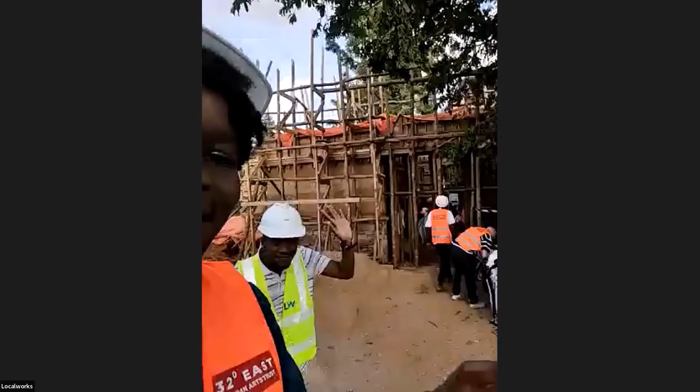So I'm kind of stalling right now, but we're getting there. We're getting there. James is a team person online. So yeah, I guess when you're ready, are you ready, James? I think we're going to be ready in about 2 minutes. Okay, so we'll be ready in 2 minutes. He's just run off now to get sorted with a few things. It's fun, it's a lot of technical support, and we've got a few cameras set up. So we're looking forward to seeing how this goes.

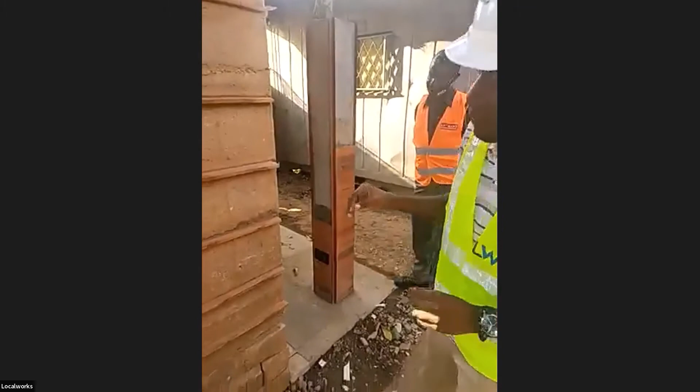I thought we should start from here, which is the sample wall. Usually on a project like this, many of the technologies we are using are a bit unconventional in this particular context, so we needed to test out most of those technologies. We decided to build a full-scale model on site, trying out different technologies and learning lessons along the way. As you may rightly see, there are certain things that over the course of this trying out and learning we have actually perfected on the actual building, as you will see.

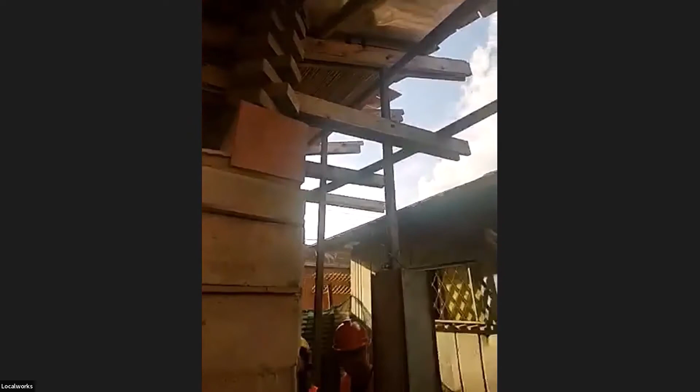Since it's a kind of hybrid thing, for those with questions that are more artistically inclined, you may ask, and those who want to understand the technical aspects, say, of the rammed earth or the stone masonry, why we have these clay drips sticking out, or the textured brick, how the roof works, why are we even using a wooden shingle roof? All those are questions we are hoping to engage with, among many others.

But basically, I think we can move around the sample wall so that you try to get a closer look at some of the things we are putting together, and possibly that could trigger in you some questions to ask.

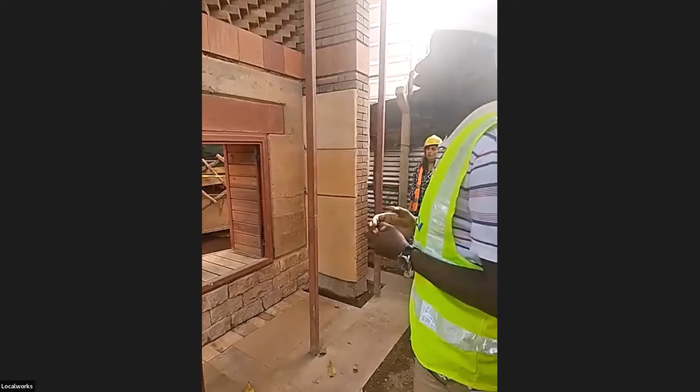So by and large, what we try to do as a practice is use materials that are locally available, because we believe in trying to build the local economy, trying to build on the craftsmanship that's already found in the local context. Part of that was also using earth.

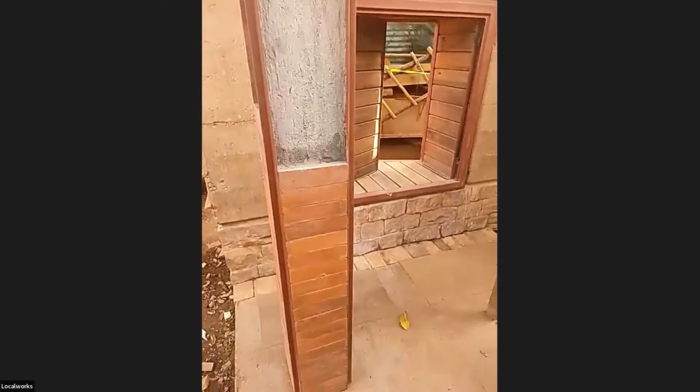You notice there are so many variations of earth in this project. We have rammed earth, we have compressed earth blocks, we have clay tiles. So there's a lot of earth going on, and maybe James Hampton will talk more about how that conversation of earth began.

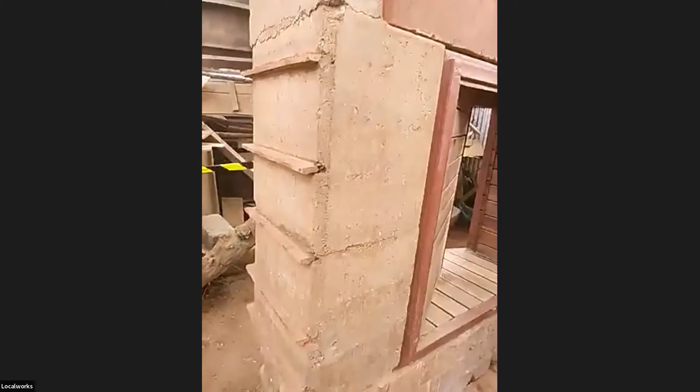When you're using earth in different kinds of usage, you have to be aware the way a rammed earth wall works as opposed to solid masonry in compressed earth blocks is a bit different. So it calls for a level of detailing. You notice there's a lot of chamfers going on in the rammed earth, and one would ask why. They are not just a design feature, but usually the corners of the rammed earth are the ones most prone to chipping. So when you provide a chamfer, you're cognizant of the fact that that will happen. You're trying to design with those things in mind.

Also, the compressed earth blocks are a thing that we create from the site. We'll be seeing the production shed in a moment. Basically, we've used the earth that we found on this very site, which still speaks to our whole design philosophy and our way of working, that we try to work with what's there in the most sustainable and sensitive way possible. Yeah, so we can continue moving around.

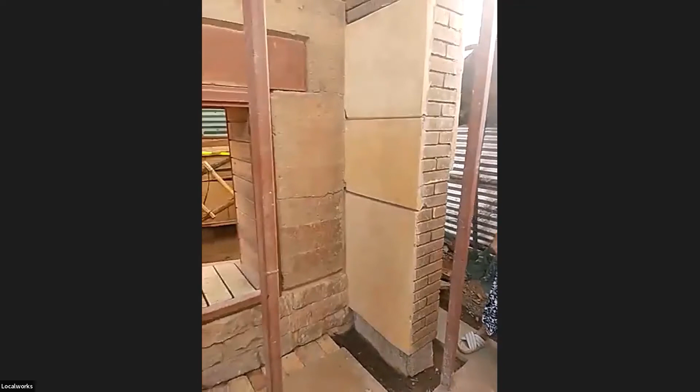You notice the shutters are made in wood. That's eucalyptus wood, and eucalyptus is one of those kinds of wood that you can find more on the market, but we've also found a balance in which we can actually design for it to perform quite well. So we are quite keen on that aspect as well.

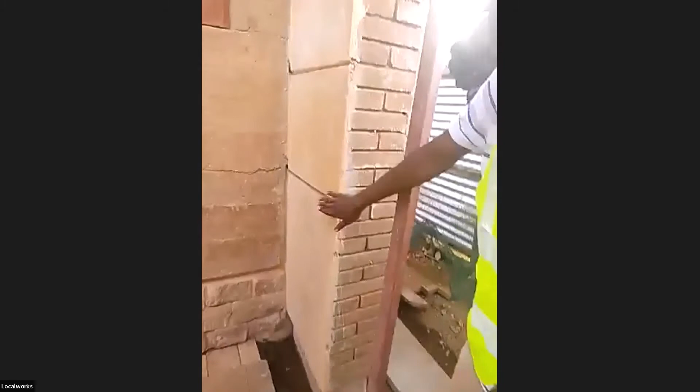What you see here are the plaster samples. Let me talk about the program of the project. This is an art center, so you have studios, a gallery in the second phase, and a cafe area. The areas that are going to be plastered are mostly the studios.

This was a process of back and forth, trying out different proportions of the earthen pigments as well as the lime to get the kind of color we were going for, still within the palette of earthen tones. We tried out quite a number, and I think we chose the one on this other side of the wall.

We had that process of back and forth, and throughout it the client was actively involved, because at the end of the day they have the final say. So we try all these things out, and along the way we and the client are both learning, but it's also like a co-design process. We believe in that collaboration, both in the design and in the implementation of it.

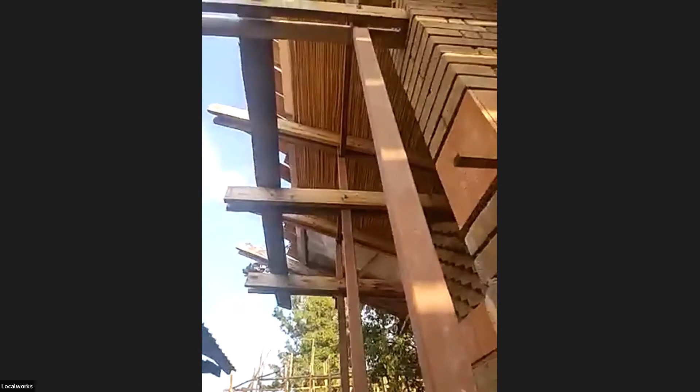I could also talk about the roof briefly. You'll notice we're using papyrus as the ceiling. What was interesting about this project is you have a textured CEB wall terminating where the ceiling literally goes through. So how you treat that junction, where you're stopping the bricks short, was something we really needed to get right.

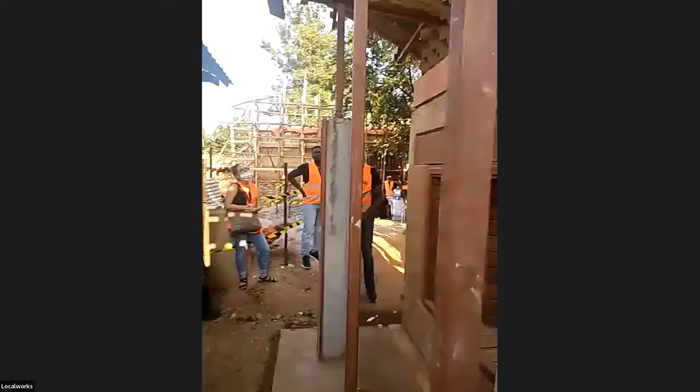We have two questions from the chat. I don't know if I missed it. How is the plaster made?

I guess Edson could speak to that. The plaster is made of lime as a binder, with some clay and natural pigments from the quarry, and sand as the structure of the plaster. The reason we do that is to maintain the openness of the wall, so we try to avoid cement, because cement seals the walls and doesn't help the wall remain healthy. If you retain moisture in, you need to get it out as much as you can. I guess that also improves the quality of air in the space.

Okay, a few more questions. Hi guys, the wall looks great. I'm very curious about the composition of soil, clay, and sand used in the rammed earth wall. Were you able to measure these? Also, what challenges did you face working with rammed earth, and how have you solved them? And another question, where is the quarry for the earth, is it local?

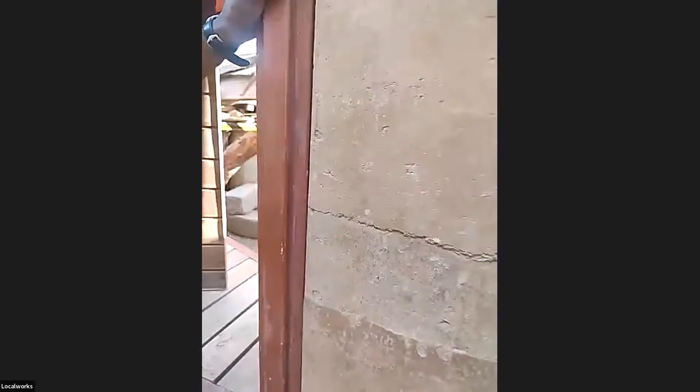Edson's team did a wonderful job designing the formwork, because when you're setting up around that wall, it's like building in concrete—you have formwork, shuttering, and all these things. But if there's any movement, this is going to happen, and at some places more movement can happen, other times less, either going in or out. It's a natural material, so it's prone to minor changes. One thing you need to get right is checking that all the shuttering is right, measuring with a laser meter to make sure everything is properly spaced. Even during the ramming of the earth, things begin to move ever so slightly, so it matters that you go in and double check if need demands it.

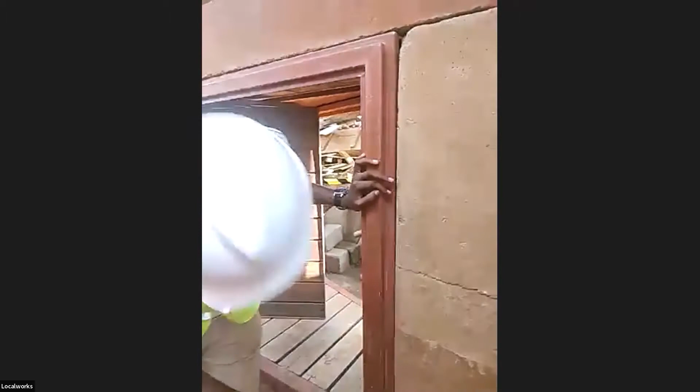The other thing was about these chamfers. What creates the chamfer is within your formwork, you have to create wooden pieces that form the shape against which the earth is going to be formed. Sometimes the wood has a tendency, as you'll see in the project, that the chamfer will bend ever so slightly, or there are minor things that still go back to checking and making sure the carpenters have done what they ought to do. There are a lot of challenges, but most of them are really around keeping the formwork stable.

We are using a pneumatic hammer, connected to compressed air, and it has so much pressure that if your formwork is not designed well, it will just break it apart.

There was also a question about the source of the dye. There's a quarry from our previous project where we get the stone from, even the stone we're using now. So the waste from that quarry is what we use as a pigment for the plaster.

You have a question? It's about color—is there a special way you try to manage consistency of color, or do you just leave it up to the sourcing, wherever it comes from? Is that by surprise, or because I can see it's very consistent in the lower part, and then there's a bit more grayish. Is that wanted? Is there a level where you say this is appreciated, but then it gets too much that you add pigments or something? How do you deal with that?

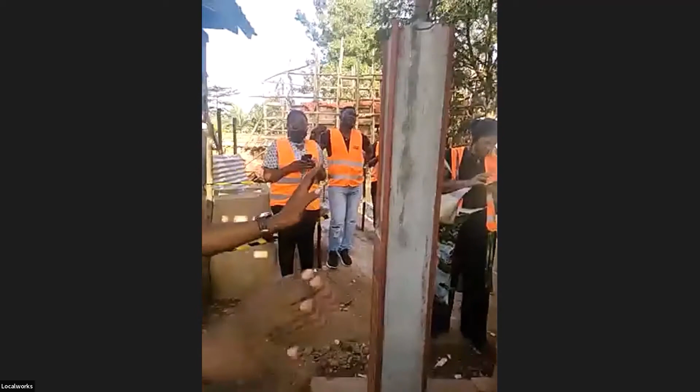One other thing we hadn't talked about is this plinth you see everywhere. The rammed earth never sits directly on the ground, and that's important because stone works better in that application. It's Edson who talks about the character of how this stone, I believe sandstone, is porous and allows moisture to freely move from one end to the other. It allows water to run off but lets moisture move freely through the material, so you won't get water-related deformation. So we have a stone plinth, as you'll see in the project, to make sure the earth is always protected from the elements, and also the roof covers the earth that's exposed to the elements.

I wanted for us to look at the roof just briefly because it's made of wood, and maybe people will have questions there as well.

Much care was put into the initial detail because we drew up the details, but we had to make mock-ups in our personal workspace to try and make sure we were getting the lapping of the different shingles right, and also testing that it will actually work. Will the water run off properly?

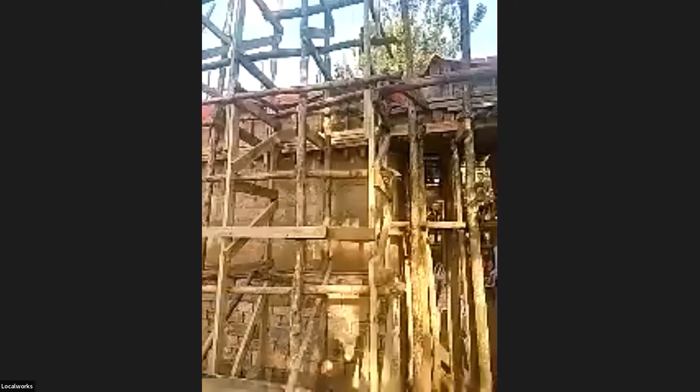What we've done isn't well captured on the sample wall because we actually have a breeze wall above all these studios, above every room, where we'll do these interlocking CEBs while leaving hit and miss gaps. So we are aware we need to allow for cross ventilation, and it's already captured within the design, though we haven't yet reached that level in construction.

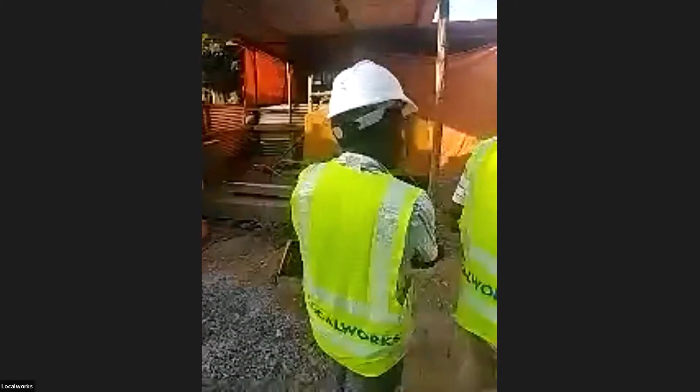Okay, we can walk and talk. We have another question. Hi everyone, I followed the work on the Children's Hospital in Entebbe, where Localworks was also involved in the rammed earth construction. I'm curious why that particular construction required a lot more stabilization than this job. Both areas aren't too far from the lake, so is the soil very different? Did you guys hear? Okay.

Yeah, of course the design requirements were different. The Entebbe Hospital had 2 levels and partially supports a floor. These walls are 7 meters tall, which is different from ours, and the structural requirements were very different. Here we are looking at 7 megapascals, in Entebbe we were looking at 20.

Okay, and sorry, I also forgot there was an earlier question from Natalie: what is the dimensioning of the rammed earth walling and how are fittings connected, bolts etc.? I think I haven't understood the part about the fittings. Which fittings?

How are fittings connected? Natalie, do you want to clarify what you mean? Maybe she means connecting power and other services. She mentions bolts, so...

Bolts, yeah. Now you can screw into the wall if you really want, though it's not desired, because earth is quite brittle, not like concrete, so you want to really avoid that. But it can receive a plug like any other wall.

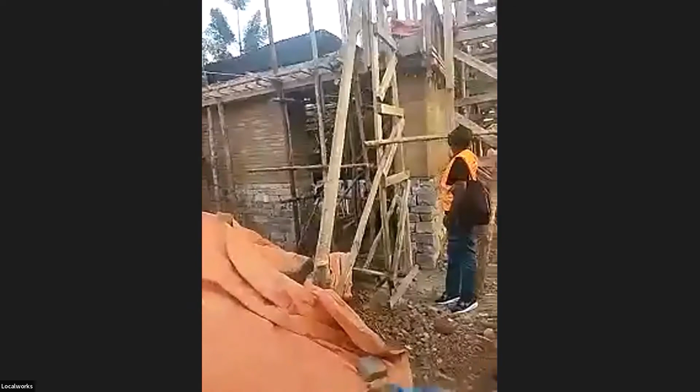We're still going about 1.5 to achieve a total of 3 meters. But then the wall even continues into the roof, so the slenderness is what determined the dimensions of this wall. We're using 500 millimeters in width. The slenderness requirement was for 500, but 500 is also wide enough for someone to work there.

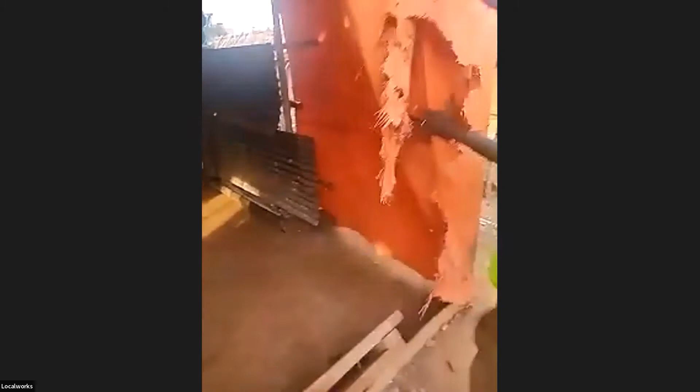What's the average time to build a two-story house, let's say with a kitchen, living room, two bedrooms, and two bathrooms, in rammed earth?

We can give it less than a year. Okay, because this is actually a two-bedroom house, if you ask me. I don't know what we're building here. I think the usable space is 166 square meters, so maybe overall say 200 square meters. And we're taking a year.

Incredible job. Do you spray your papyrus with wax spray to avoid replacement every now and then, or do you just dry and use them like that?

The papyrus, and mainly all the natural materials we're using that are covered, are treated with borax. So as long as you don't have issues with water washing away the chemicals, it should last for as long as it can.

Okay, great. So this is where the sieved soil is stored. What you see there is what we throw off after sieving, for further sieving to try and get a certain level of granules. What you see on the left is the machine, which it's a shame we couldn't try out.

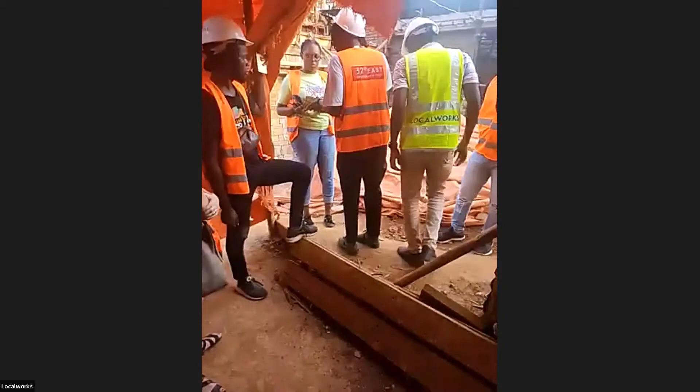So as we walk to the other space, some other questions from our online viewers. To the question of rammed earth wall thickness, why 500? Why not 600 or 300, 400, etc.? And then we also have a question about, is the firm outsourcing any construction, for example, windows? And maybe one more question, and then we still have more, but we'll group them. What is the cost of building per square meter with rammed earth? How does it compare with brick or stonework? Everyone else, you can please feel free to enter.

This is one of our studios. So come. Do you remember the question? Yes, this will be an artist studio.

If you could just refresh the questions, I sort of lost it. One was about the size of the rammed earth wall, why not 300, why not 600. But I feel like I'd already answered that. It's really just on the stiffness requirements and the constructability of that wall. Someone needs to work within that wall with it. So 300, I don't think you can actually work there. But even if the stiffness allows, 600 may be a waste if 500 can work.

Then are you outsourcing any construction? Not really. Apart from plumbing and electrical, the rest is in-house.

Okay, then cost per square meter with rammed earth, how does it compare with brick or stonework? Definitely higher. I don't know, that's something that we can probably elaborate on, because the cost person is not here, but that's something we can elaborate more maybe later.

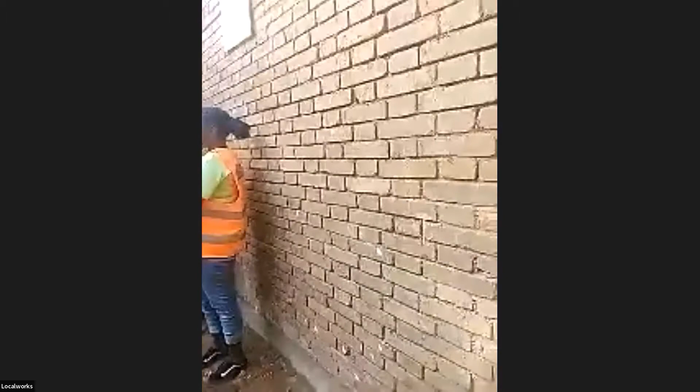One of the things I can mention about that wall in particular, and this as well, these are the walls that are going to be plastered. So the masons were careful with the placing of the bricks, but one would rightly point out that the mortar joints are a bit all over the place. But in the interest of time, we were like, why spend the very same amount of time doing that, which will remain as it is here?

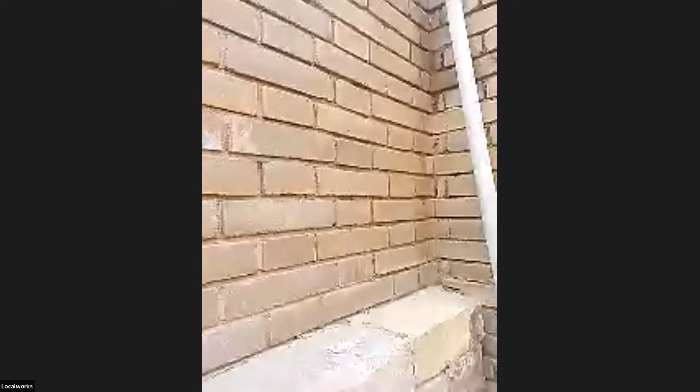It was that kind of thought, that this is going to receive about 20 millimeters of plaster, and you'll notice there's a groove where that is supposed to come and sort of vanish into the rammed earth. So it creates the illusion that the rammed earth starts and stops, and yet it's running all the way through. On the outside, you'll see it running all the way through. So that was a design decision.

And what you see on that side, I see some of the, I don't know who has taken to branding the building already, but they already have signage going on.

One of the interesting things about that wall in particular is the transition from the stone to the brick. And I was asked a few questions earlier about what do you do at that interface, how do you transition properly. So one of the things is a structural thing, that the upper side of the wall and the lower have to be integrated in some way. And possibly Edson will talk about that.

But from an architectural perspective, we tend to be obsessive about that mortar joint being 10. The masons are at pains trying to get it there, but they manage to do it quite well, in my view. So it creates the illusion that it's just sitting there, but there's some structural work underneath that perhaps Edson could shed some light on.

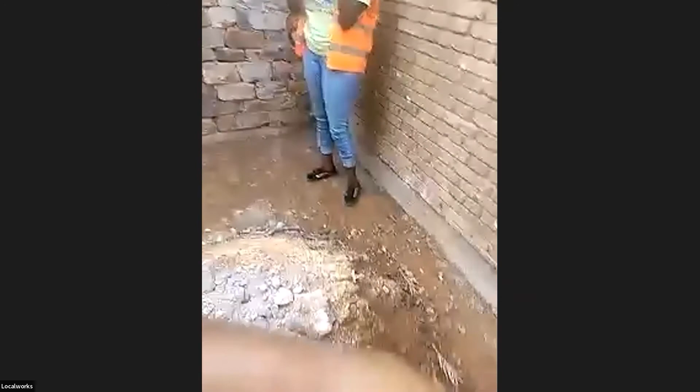There's actually not much there, it's just a continuous masonry. On the earth, we actually have a concrete kicker because you want to put formwork on something that's a bit level. That's on the rammed earth, but on the masonry wall, that is just a normal mortar bed. Right, because it's really a continuation from stone masonry to brick masonry.

So, any questions on this part in particular? Excuse me, just a little puzzle: how do you fit it in? You fit it in with some kind of cement? Which one, the stones?

Yeah, so that they are grouted, they are all grouted with cement. We call it grouting. You have to press them in a good way, not because we are not plastering them, but then the core is grouted. We put cement grout to hold the stones together. But of course we are careful, we are trying to be careful that it doesn't come out because no one wants to see it.

Because now my expression comes with these gullies besides the road. Sometimes when there's a lot of water, you see how it splits. Yeah, it's the imagination I was having relative to this. No, okay.

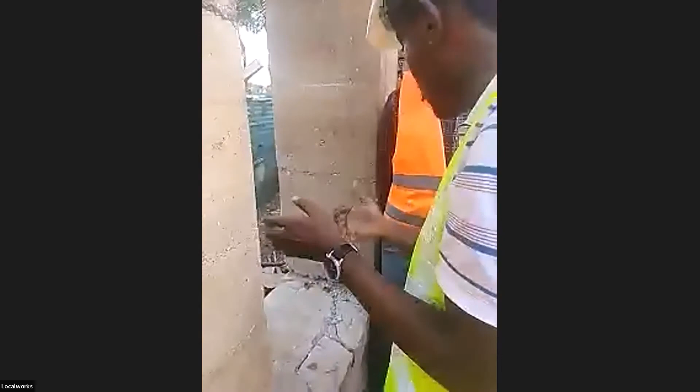And I think for purposes of water, when we have these window boxes, I think you saw at the sample wall. So it's literally going to sit on this, and it's even going to overlap, so it's going to create...

How do you design the compressed blocks for additional resistance to rain? Do you add something to the mix, cement?

Well, for sure, what are the fines in the soil? Which is the clay. So when that clay breaks down, it ends up breaking the material. Over time, we've realized that adding a certain amount of lime in the mix kills that. But of course, there's a balance - too much lime will destroy it, and too little will also not work. So you have to get the optimum amount where the lime is actually just active.

Did you have to bring any earth from outside as well? What was the quality of the earth that you found on site?

I don't remember for sure what the quality of earth is. No, we didn't get any soil from outside. It's a bit of a sandy clay soil, and we blend it. Even for the blocks, we're actually blending it with more sand to get the right composition that would be good for stabilizing the cement.

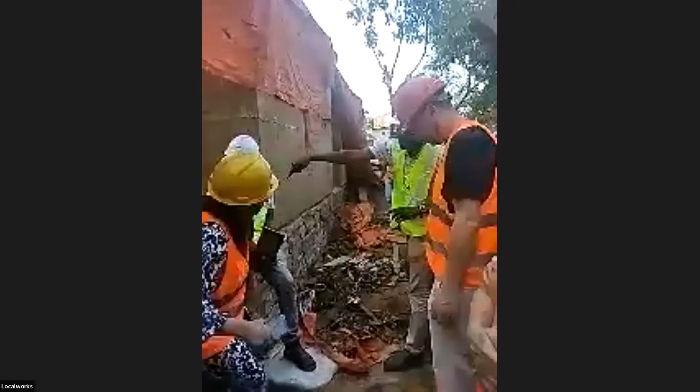I'm a bit interested in this. What Edson is doing is actually right - if you remember, back in the adjacent space, what we were standing on isn't the finished floor level, it's going to be a bit higher. This will be 450 mil off the finished floor. So this window has basically been designed to be a certain height. So what he's doing is actually right, though of course there will be a more comfortable seating area.

The window is in here. At some point it comes all the way somewhere, pushes on - it's a box. But can you sit from outside in there, or from inside? Outside, this level will be much lower, so it might be very difficult. But from inside, we are raising this level to match the road. So there's a lot of retaining - you're supposed to sit from inside.

Security, yeah. But also maybe for a short garden - accessible, but not too accessible.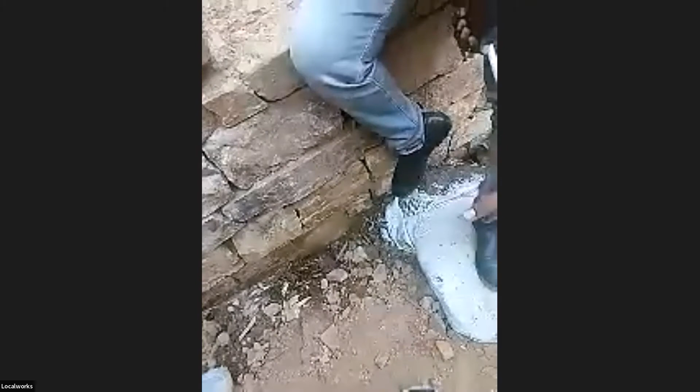Something else Edson just mentioned, that the final floor level where we are standing is going to slope away ever so slightly to the road. And that means the stone you're seeing here - carefully look here - so when we scrape away this earth, it's going to... So I think we won't go too far to that side.

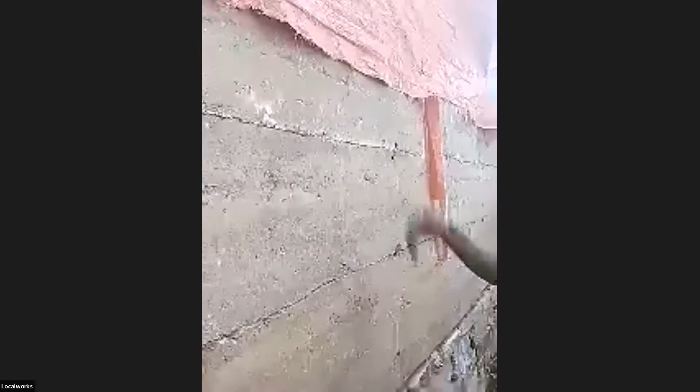Yeah, but this is what it looks like from the outside. Now the lines you're seeing of transition, we're going to have clay drips on the exterior of the wall, because the clay drips help with the runoff, the water that runs off the surface of the wall. So the drip gives it a place where it falls away. We've done that at the intervals where you ram in layers, so everywhere you have a layer, you'll end up with a line. Our clay drips will align with those lines, and hopefully at the end, all you'll see will be the clay drips on the exterior.

I don't know if there are some questions here, but we could go back so we see just the other end, and then we can move to the canteen in preparation for the presentation. Yeah, okay, as we move, okay.

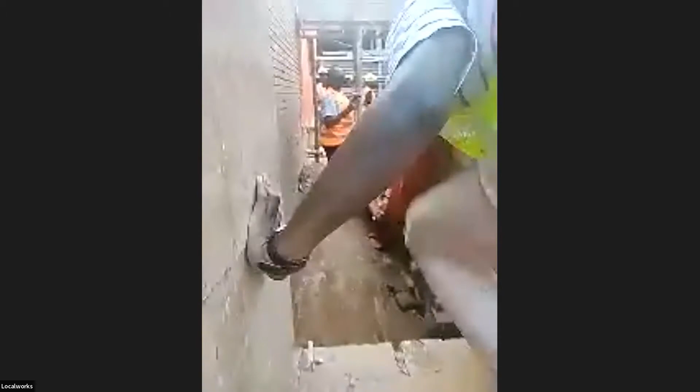Someone is asking, I'm interested in knowing the lifespan between the stone built house and rammed earth, as well as the adobe bricks. They actually know that, yeah, compressed earth block. But the lifespan, I guess, of the building. I can't hold it, maybe you can hold. Let me help you hold. Okay. Yeah, you can answer the question.

People have built with earth construction for so many years, and most of these buildings, some are still standing today. So I do believe these are some of the most long-lasting materials when designed, right? That's when someone asked about the lifespan of a building designed with rammed earth, or adobe construction, as opposed to regular kinds. All buildings are supposed to be designed and built to standards, and for normal buildings you have at least a 50-year service life. That doesn't mean the building will melt away, but it means that at that point either the building will no longer serve its purposes structurally, or it might need major maintenance to regain its original status.

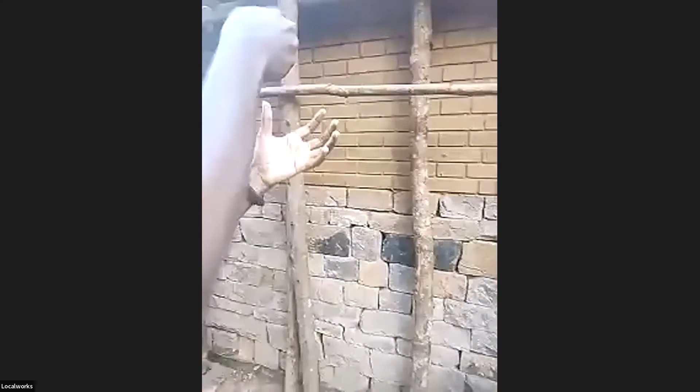Right, so the different studio rooms are more or less typical, so what we saw in the other room is what you expect for these others. Right here is where the washrooms will be. We've designed for that. We have a little niche right there for storing our fire safety equipment, because all of us have at one point interacted with a place where you're walking through a corridor and you literally run into a fire extinguisher that's clamped to the wall. So we try to be aware of that and design for it.

Maybe one last thing I could mention, in the interest of time, is why we've pushed this back: we have a sliding shutter that's going to come, and it comes back into this niche and then goes out to close the opening. So these are not like side-hung shutters, they'll be sliding to and fro.

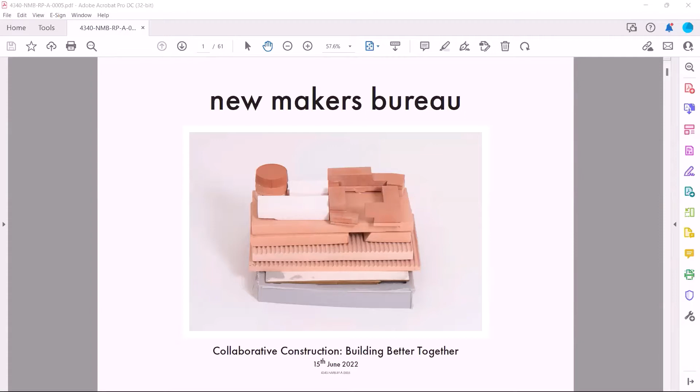Hello, hi James, can you hear us? Yeah, I can hear you fine. Can you hear me? It's just our sound. James, maybe if you want to say something for the online people. Okay, I'll just flick through the slides. Cool, we'll do a silent slideshow for the people in the cafe, which seems a bit of a shame. Battery 100%, ready? Connected here? Yeah. James, we can hear you now. Yeah, okay, is that good? Yes. Okay, cool, I'll start.

Tessa's done a really good job of explaining a bit of the history. I want to talk about a bit more of the design history, I guess. And I think just to emphasize and reiterate what Tessa said about the fact that it's been such a long journey to get to this point, that it hasn't necessarily been a straightforward process. And it started, I think,

Tessa joined as we were starting to get involved, and we were asked to help move the containers. There were these 4 or 5 containers on the previous site, and we were asked to help move them, help look for the new site, and advise if we could.

And then it kind of just grew into something much bigger. We questioned why you'd spend all this money just moving these containers, because it's not as simple as just picking them up and moving them, as Tessa referred to.

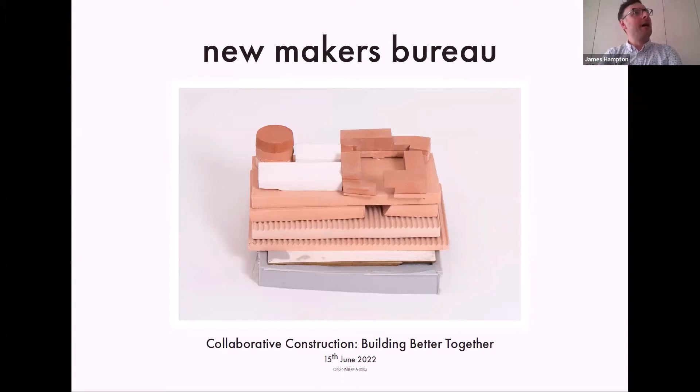And why don't we just set our goals a little bit higher. And I think what was amazing working with Tessa is that she wasn't concerned by that kind of monumental fundraising requirement that she's ultimately responsible for.

Yeah, she just kind of took it and ran with it, and then here we are. Now you're sitting in the building, almost complete, the first phase almost complete.

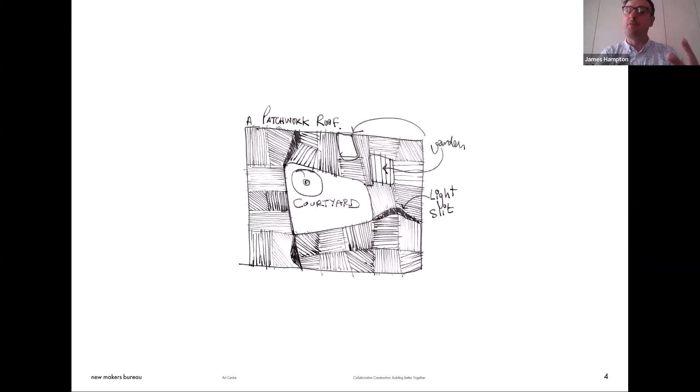These sketches are really early on, from 2016. I think this was before there was even a site, so it was just sort of brief forming. What was really interesting is even when there wasn't a site, there was this idea of a courtyard building done before any site at all. There's this idea of a courtyard as a kind of social space, a communal space, that everything came from.

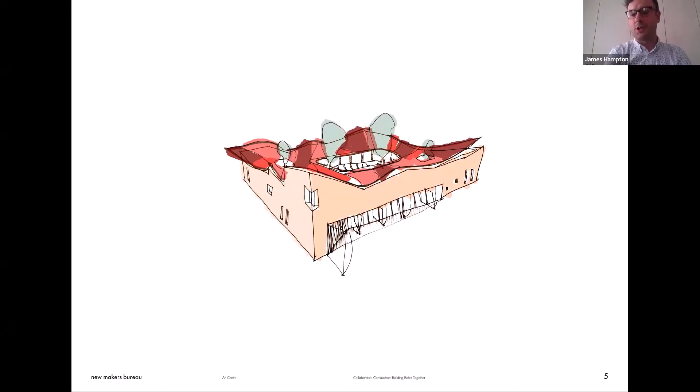It was a shady space, with planting and trees, and roofs that overhang. There's this sort of containment to the building so that it would feel both open and inviting, but also very secure for the artist. There's kind of a metaphor for what 32 do, that it's a place artists can feel safe and secure and do what they like. That was an idea right from the beginning.

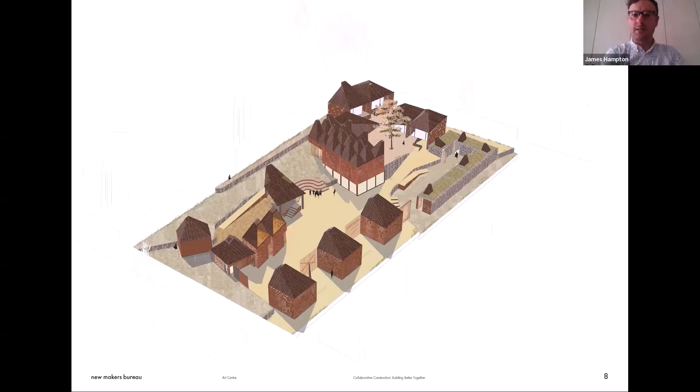This is one of the images we used to kind of sell the project, to fundraise as well. But by the time we got to this site, it was actually about 3 or 4 years later, around 2020 - end of 2019 or beginning to mid 2020. It's a completely different site, but I think lots of the key principles and values of the project had been established.

So it was definitely a faster process to get to the design once we got to this site. There were some similarities, like it was very, very slopey, and maybe that's familiar to a lot of Kampala anyway, since Kampala is built on hills. But in this instance, because the site's a bit smaller, the change in level is quite dramatic from one side to the other.

That's why we developed this kind of stone datum, which goes along the bottom of the building - this horizontal datum line which tells you where you are on the slope.

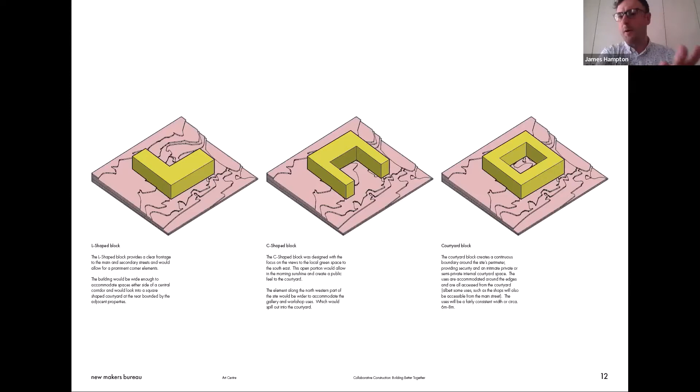I should have mentioned that in this presentation we've just shown lots of our process, really - some of the more messy things we might not usually show, just to reveal how we work. As a practice, we very much work between making models, doing things in the computer three-dimensionally, taking photographs of the models, doing hand sketches - these things go around in a bit of a tumble dryer or washing machine, all mixing up together. Then we look at research of things we like, things we're interested in, things we think are relevant to this project.

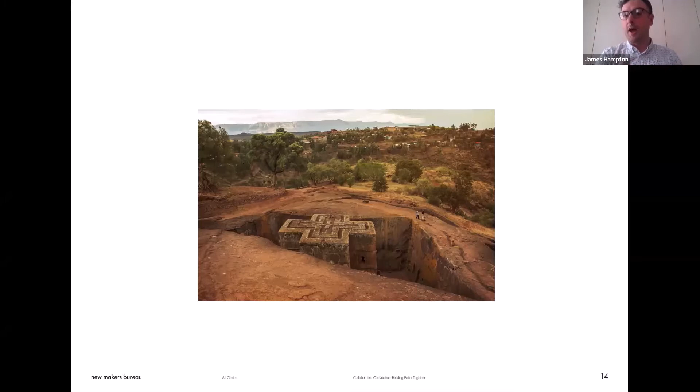So this is somewhere between the 7th and 13th century. There's this amazing place in Ethiopia, a series of churches carved out of the earth - they weren't built, they were just carved away.

We've kind of taken that idea in a way to this project, that the building is very much of the earth. We're not necessarily carving into it, we kind of are in places, but everything, as much as possible, the building comes from the site directly.

And then there's this idea about shadows and the significance of darkness versus light. I remember one of the really early conversations I had with Felix at Localworks back in 2016, the first time we came to Kampala, that as a person coming from the UK and educated in the UK, where the modernist tradition of architecture is having huge windows and loads of light, that's a very standard thing architects will do in the UK and much of Europe as well.

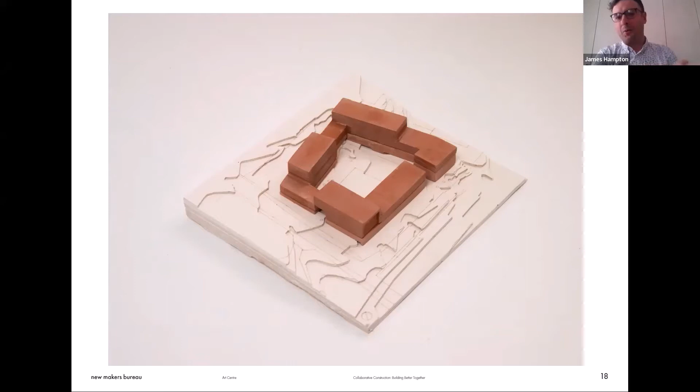But he pointed out that in Uganda, you're on the equator, and actually you've got so much light that sometimes you might want to retreat away from the light and have spaces that are much more shady and much darker. So there's these kind of sensitivities to the very specific nature of Kampala and the place that are impossible for us to have, and that we have learned so much from this dialogue with Localworks and with 32 as well, that some of that stuff we've kind of taken back to the UK.

So there's a bit of a cross between, and that's one of the reasons we're doing this, purely from a selfish perspective. There's so much stuff we're learning in this project that we're kind of bringing into the UK, and it also allows us to do things that we might not be able to do in the UK at this stage in our development as a practice.

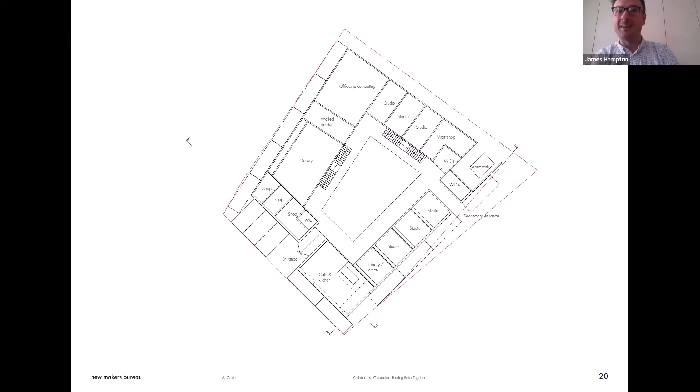So building out of rammed earth, for example, in the UK, it's quite difficult. And all those questions you had earlier about how much cement goes into the rammed earth and how much is the earth and all the rest of it, building a rammed earth wall in the UK is pretty much mainly cement, and then there's a bit of earth chucked in. It's a very different thing. It doesn't have quite the same environmental considerations as it does when we're doing it in Kampala, which is really, really nice.

And I think that's another draw of this project for us, is our practice is really focused on embodied carbon particularly - the amount of energy that goes into the building before it's even been occupied. In the UK, it's about 50% of a building's whole life carbon that's spent before the building's even been moved into, which is a crazy statistic when you think about it.

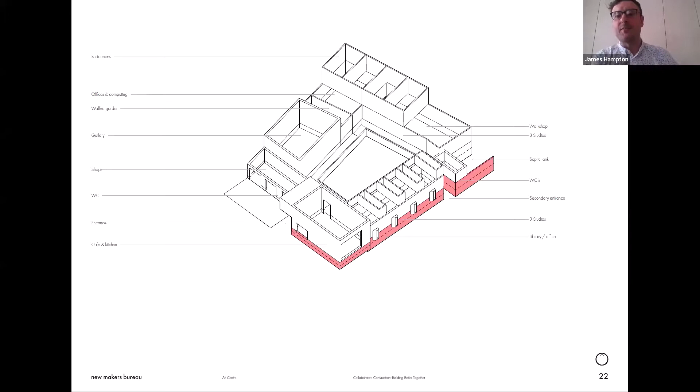So building out of earth and using materials from the site or as close to the site as possible is all about reducing the embodied carbon in the building. It also has some amazing thermal qualities as well. It has really high thermal mass, so it holds in the cool air from the nighttime and helps to re-radiate it in the daytime so the spaces feel a bit cooler. So those thick walls, 500 millimeters thick, made of earth, actually help to cool the space as well.

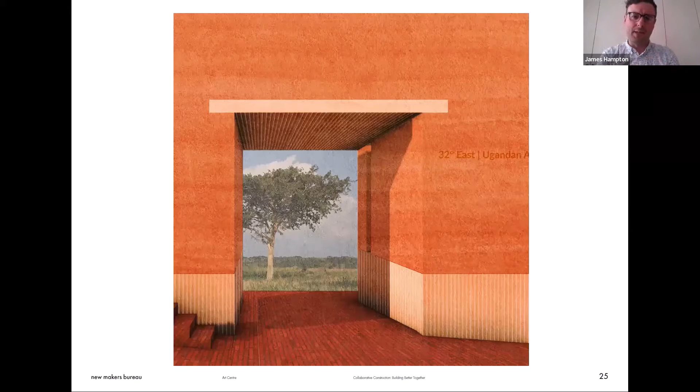So I think this is kind of the idea of the building being almost like a love affair with earth, with different ways you can experiment and use earth in construction. And another thing we've learned, a lot of that knowledge has come from Localworks, because they've been doing it all over Uganda, and they've taken us to some of their amazing earth projects out of Kampala. I think this is the first rammed earth project in Kampala - Felix can confirm that for me or not.

But again, there's this kind of knowledge sharing that we're learning from Localworks in terms of all their constructional knowledge and also the way they work. It's really nice working with another architecture practice and learning how they work and what their process is. And hopefully they've learned some of what our process is as well - this kind of exchange between us.

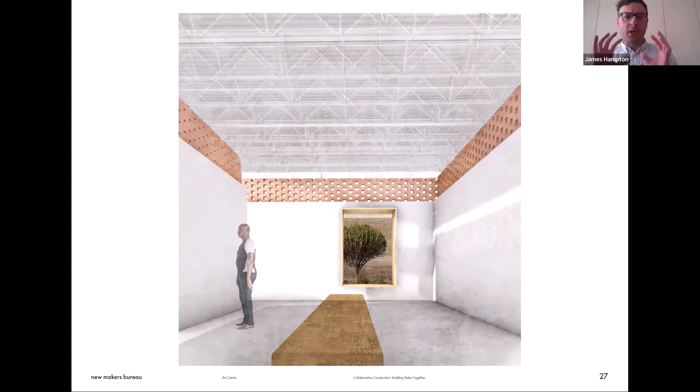But Localworks, they go and make things. As soon as there's a problem we're discussing about how we make the roof or a piece of wall, they just say, well, let's go and test it, and immediately goes and gets tested. And that's how they kind of learn. In the UK, that doesn't happen quite as much until you're at the later stages on site. The regulations are much tighter, and it's a slightly different kind of creative environment for working as an architect.

So that's been really nice to see how those processes differ and what we can learn from them. This is the gallery space, and there's a few images before this and after which show the progression of the gallery space. So this is pretty much how it will be when it's complete now.

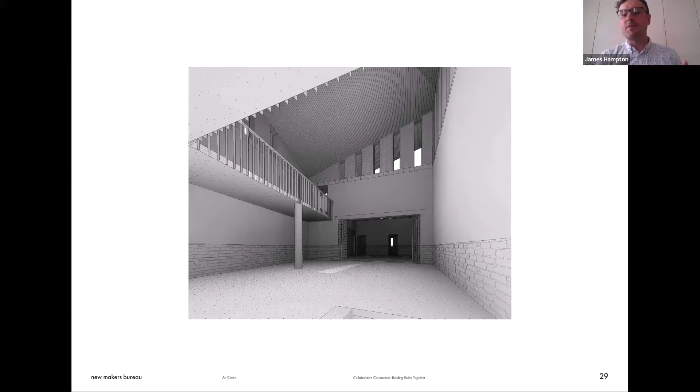This is actually an image from Localworks. I think the reason we're showing these images is that during the really detailed design phases, things inevitably change in the architectural process anyway, and even when you're on site, things change. But with Localworks, there's this really nice generosity of spirit, that all these kinds of changes that happened came with a really good understanding of what we were trying to do in the building, the core principles that we wanted the building to have.

And they managed to improve it. I think the building, as a result of this collaboration, is much better than it would have been without it. It probably would have been, it might not have even worked, to be frank with you, because we don't understand the context in a way completely fully.

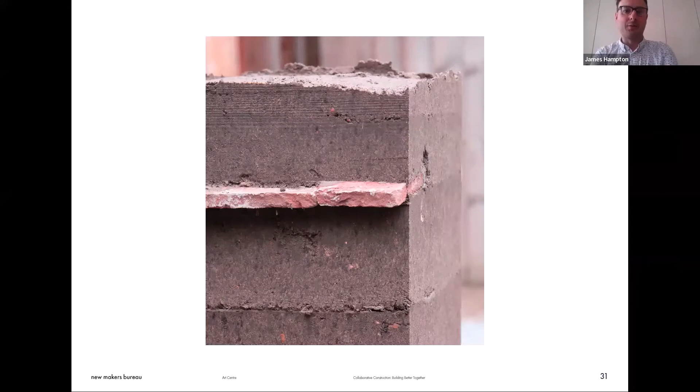And some of the images here show the roof construction, for example, because we had a really tough time designing the roofs. Designing roofs in the UK is a completely different set of criteria. It's a completely different thing.

Sometimes you don't have any roofs, you just have a kind of flat roof with a little parapet that comes up. Sometimes you have these slightly overhanging eaves or pitches or whatever. But in Uganda, you really need these overhangs, these really, really big overhangs. And roofs, as a result, tend to be quite expressive, or have the possibilities of being really expressive. And that was something we found quite challenging.

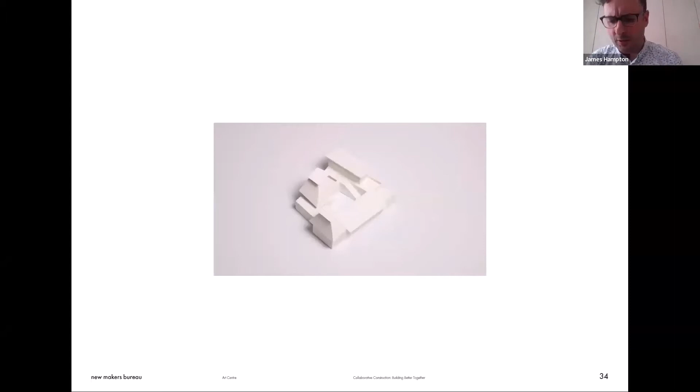These are some of the model studies we did, testing all these different ways that the roof might change and work. And it didn't really end up being any of those. You'll probably see a recurring theme in these slides, that the roofs kept changing quite often until we get down to what we've got now on site.

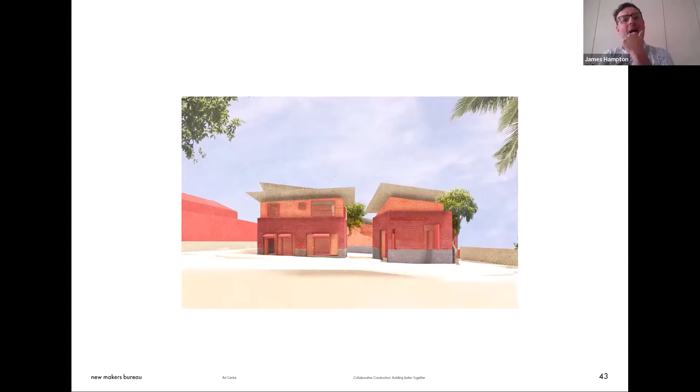This image is from sometime during the planning stage. You can see the roofs are still very flat and not very detailed, while the rest of the building has been quite well considered, and the roofs still haven't -- we hadn't really understood how to do the roofs at this stage. It's quite interesting that that was one of the last things that got pinned down in a way, and kept changing.

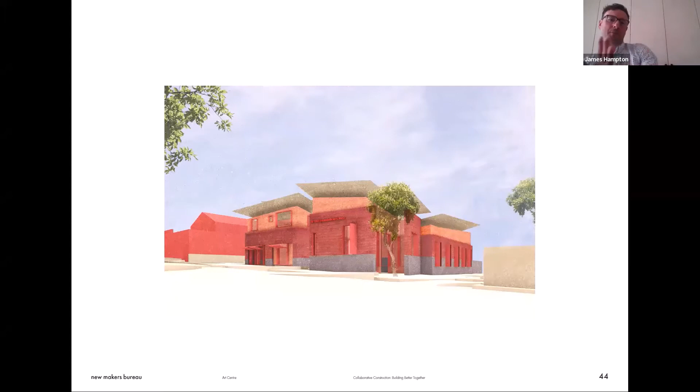So this is a view from just as you're walking down past the main road and then towards the university, which cuts through. And you can see that stone datum line that was always really, really important to us. And then these big punched-out windows which frame specific views.

So when you're inside, there's two different types of windows in a way. There's really big openings, which are about this inside-outside connection, where people on the outside of the building, the public, can see and have this kind of porosity, which the cafe will have and which those kiosks will have on the left of your image now.

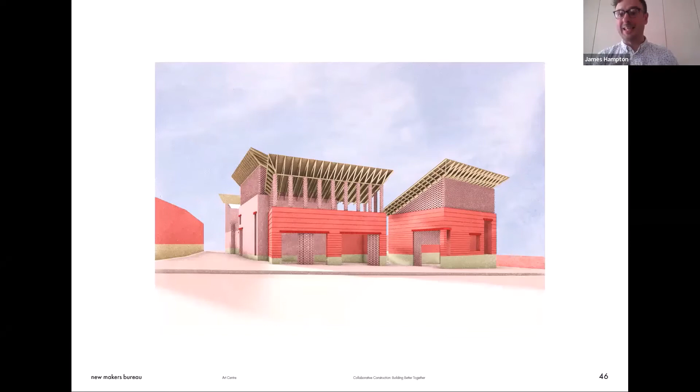And then there's also these windows that are much smaller and a bit more intimate, and they're much more about the individual inside, having a very specific view outside, or a specific relationship with the outside. The ones that James or Edson were sitting in just now in the studios, you have a window seat and you'll be able to sit there in the window, kind of straddling the inside and the outside.

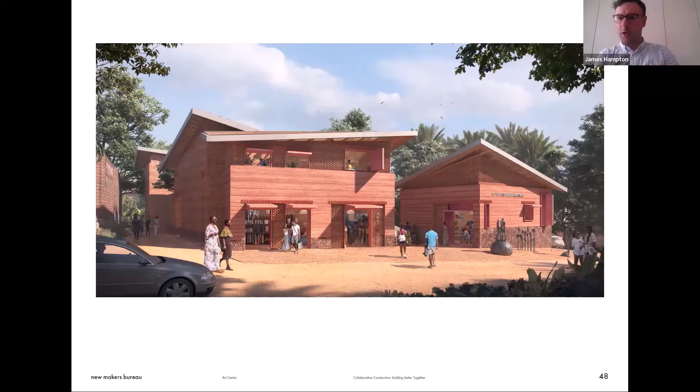But there was this very iterative process, doing these drawings and images, and then working back with 32° East, working with the trustees, with the board, and then with Localworks as well. There's loads of this that we've just pulled out from our server, but I thought it was interesting to show you some of the more crude stuff. This is us kind of, we wouldn't usually show this, it's just how we explore things, and normally we'd be spinning around these models to understand what they feel like.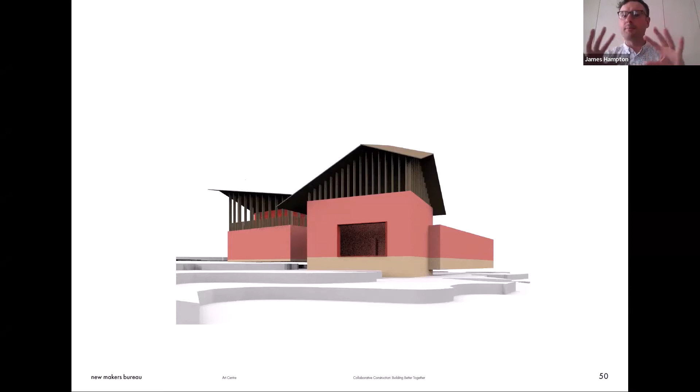There was always this idea, you know, above. So there's the stone datum, and then there's the rammed earth datum, and then above that there's this area which is much more about letting in dappled light and ventilation as well. In that roof space above the rammed earth, there's always some openness which lets in light and also ventilates. And there's a little gap between the roof and the top of that brick wall as well, which lets in ventilation and air.

There's also this idea about textures and exploring all these different textures, because again, the qualities in Kampala, the light qualities on the equator where the sun goes straight up and then straight down again, is very different from the UK. So we were quite hypnotized by that in a way, by what you can do with shadow and that play of light as it moves across the face of the building, how you can explore all these different textures in the building's skin to really emphasize the way the sun's moving.

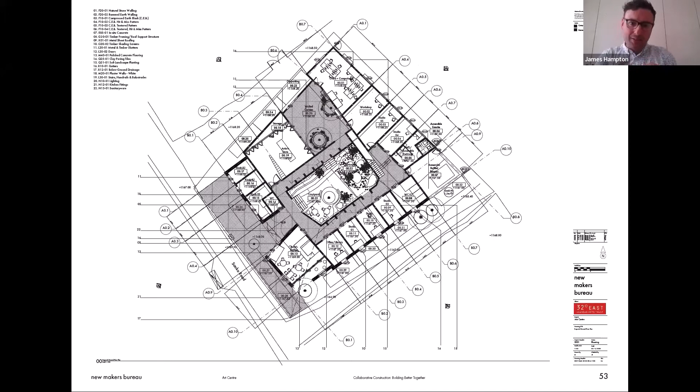So yeah, this is the plan that's pretty much settled on now and is what will be constructed. So you're sitting in the bottom left of that image, which is the cafe, and then the studios run off, which is phase 1, and then in phase 2 is the art gallery. There's another sub courtyard which the art gallery opens out onto, so you have this quality of being able to have artwork outside in the courtyard directly associated with the gallery space as well.

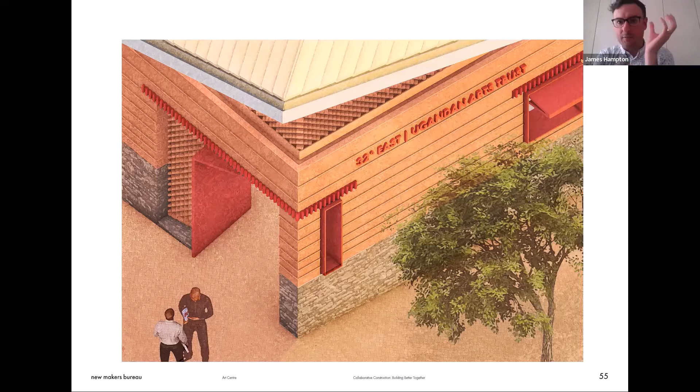And then right to the rear of the site is the accommodation, because it's the quietest place in the site. You might have seen from the roof plan, there's these slots which go across the roofs, which let light in, very thin, so you don't have too much solar gain, too much heat coming into the spaces. But you'll get enough light that when you're in the studio, you've got enough light to illuminate your work, or when you're in the cafe, you've got enough light to see what you're doing.

So you can see here the pop-out windows, and then the open brickwork in the band above the rammed earth, which is for ventilation, but also gives you this soft quality of light. Same in the cafe on the left as well. And this image is pretty much where you're sitting now. So that will be, yeah, where you're sitting.

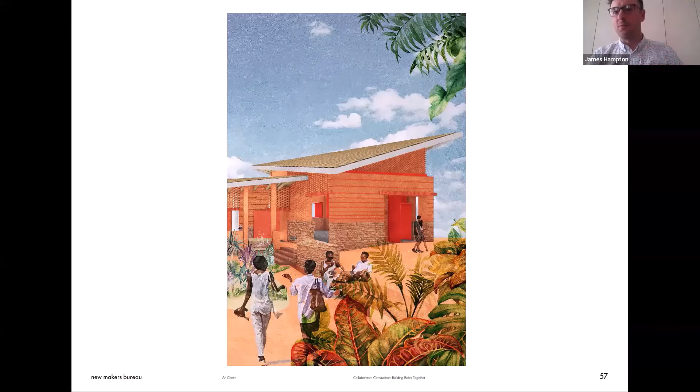And there's little details like the lintels above the doors, these concrete elements you see in the reddy tones above the doorways, which we've cast using corrugated metal, because that was something that we felt as someone visiting Kampala, we saw these metal roofs everywhere, this corrugated metal. We thought it was quite a very familiar texture.

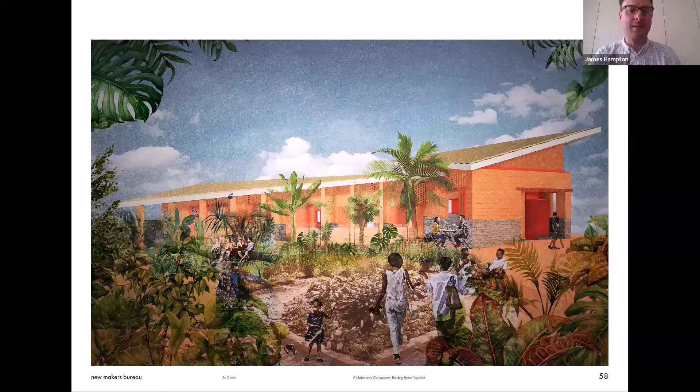We wanted to reuse it in the language of the building, but in these little details. The lintel details are cast against corrugated metal as a little nod to the context. And then there's these two last images, which are from Localworks, but I think they sum up the collaboration really well.

They talk about the part of the building on the left, where we really couldn't figure out how we were going to deal with the first floor and the openings. We had these big square windows before, and they just didn't work, they let in too much light. Working through months and months of this process with Localworks, we came up with a solution that wasn't just about light, it was about ventilation and the structural strategy, which we wouldn't have arrived at on our own.

Yeah, there we are. I think I was given 20 minutes, so hopefully that was on. Thank you very much, James. I don't know if you can hear the people clapping. Yes, I can. Yes, thank you.

A multidisciplinary design collaborative that specializes in design and realization of great architecture and art. As an established group of designers, Localworks have over the years delivered a number of sustainable design projects, often located in remote parts of the country, and always characterized by a deep love for local materials.

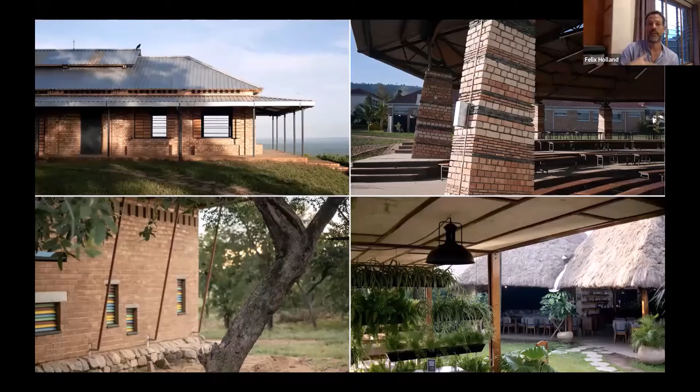We did schools, community centers, lodges, restaurants, residential homes and such things, always designed to be as appropriate as possible, being environmentally conscious, experimenting with local materials, and also especially getting our teeth into earth construction, which was something we were all very attracted to.

I think you heard especially Edson talking about it. This is something we really got excited about and wanted to learn. And then of course all of that trying to be socially and culturally appropriate as well.

In many ways, I could say that this journey was a smooth ride. We got a lot of interesting projects, we got better at what we're doing, we enjoyed what we're doing, and we were given the opportunity to try out stuff.

For that you need the right clients, but to a certain extent you also attract the right clients by doing what you're doing. If you have a very clear identity in what you're trying to achieve... there was really only one cloud on the horizon, and that was that we realized we were running out of contractors.

I think there were two key reasons why we were running out of contractors. For one, we are quite meticulous in what we are trying to achieve. We are certainly not the only ones, but if you speak to contractors, on one hand they do appreciate an architect who knows what he wants, but on the other hand, if you really police this down to the last dot and detail, it becomes something that some contractors experience as quite a burden on them.

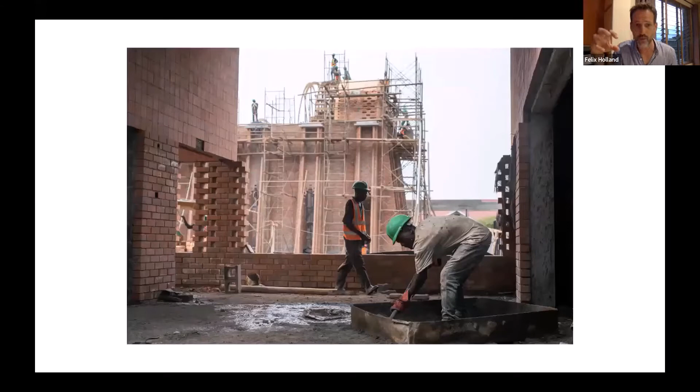The other main reason, I would say, was that we became more and more adventurous in how we wanted to use primary structural materials, which is also not something a typical contractor is very excited about. At that point in time, we were just working on a monastery project in Rakai in southern Uganda.

We went through a particularly difficult phase in regards to delivering this project successfully. This project was generally a very complex project. It had a barrel vaulted church with reinforced brickwork, pre-stressed hit-and-miss walls as structural elements, and fair-faced polished concrete floors, and all these things.

We were initially very excited about the contractor chosen on our recommendation, but sadly we realized at some point that our ambition as the design architects and the contractor's more commercial approach did not really gel very well, and it became quite a tough process for the client as well. We should always remember that such issues directly affect the client just as much as they affect the other two parties.

At that point in time, a group of people walked through our office doors called Friends of Mustard Seed, and their idea was to start a new type of Ugandan village school. They were extremely ambitious in what they wanted to achieve.

They started a school from scratch, and they wanted to really invent a new type of curriculum, a new type of education that marries what is normal in Uganda, the normal Ugandan way of teaching, with different ways of teaching. Active learning was one of the key words.

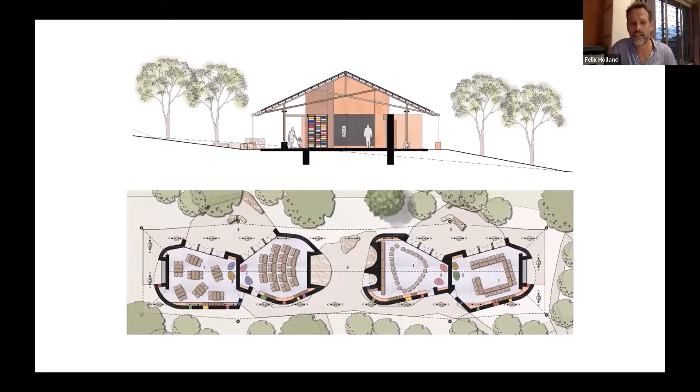So really you can say that two elements: one, a growing frustration about a generally unproductive way of working or of constructing, and two, our growing appetite for experimentation. Those two really now combined to form the idea that we needed to start our own building group. And that is really how Localworks started.

Design and build is what sort of everybody knows about, but we felt that you can't do this type of work if you don't also emphasize on the importance of research. And then the share element is the reason why we're here this evening.

On the research side, this is mostly about exploring the materials that we're using, the technologies that we are interested in. There is generally not very much available in terms of proper research on stuff that is relevant to the East African construction sector in the green area. So we want to change that over time. We want to promote the use of local materials by providing proper information about it.

Examples of what we have done in the past is learning about earth construction, is learning about materials like bamboo, is also about developing certain technologies. So we are doing something that we call eco prefab at the moment, where we are developing a system that we hope can be replicated more easily.

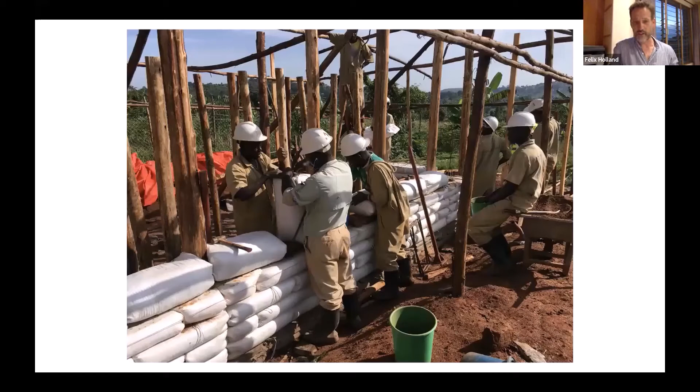Then the build team, for us it was mostly about, that was what we were mostly engaged about in the last 2 years, building up the capacity to actually properly deliver construction projects. For us this meant mostly establishing a senior management team at the office consisting of a construction manager, finance manager, and a person for admin and HR.

And then on the site level, it was about really calling on our many contacts that we have built up over the years and really bringing together the skills that we know people have, bringing the right people together, and then building on the skill that is already there and improving it with time. I think skilling and growing the team is the biggest challenge on our construction site that we're working very hard on. Having completed the mustard seed project, our second project was indeed 32 degrees.

It is really inspiring to see how some of the lessons learned on the first project have directly translated into a serious improvement on the second project, and how there has already been some understanding of the Localworks way of doing things that simply speeds up the process. I do expect this to improve further with time.

Then a third project that we have now just started on site is that eco prefab project I mentioned, where we are building some teachers' housing in Ruengo district.

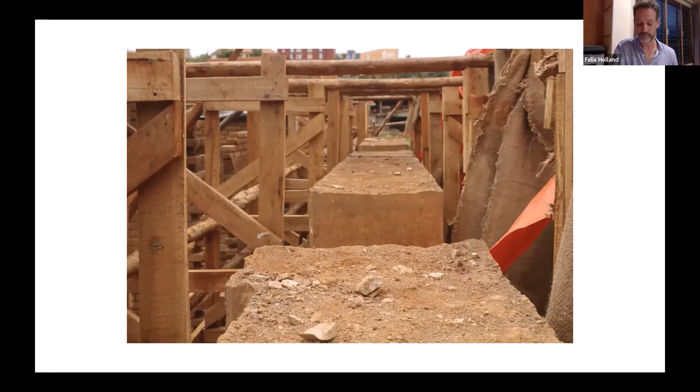I do believe that overall, the risk of this conflict of interest is outweighed by the advantages of an integrated process. I think we are generally not talking enough about the process. This evening is really about the process, because we are not talking enough about it. I think everybody got an idea of how complex such things are, and complexity is something very beautiful as well, and it needs to be celebrated.

Of course, we are doing this with a group of artists. And artists are actually people who know everything about process. Architects tend to be very result-driven people. We like our nice buildings standing there, and we're not really keen on ambiguity and process and failure and all such things. We are keen on getting it all done. Now, artists are actually experts in understanding the importance of the path versus getting there.

To me, it is important that we look at the process of designing and building and of using the building eventually, that we look at this process as an integral part of it, and maybe even as the most important thing in it. And that is what our journey is all about.